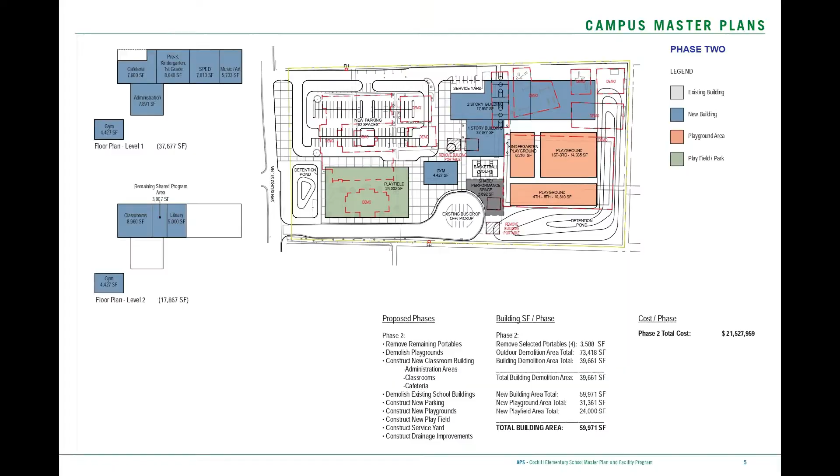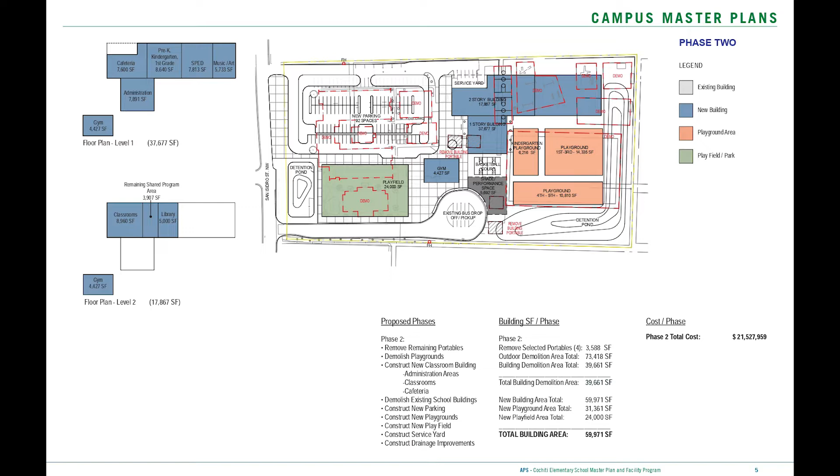Our team prepared the long-range campus master plans for 3 existing elementary schools for Albuquerque Public Schools. The campus master plan will serve to guide future development at each campus over the next 25 years to meet current APS design standards.

The planning and design efforts involved extensive research of existing documentation for each school, including utility locations and capacity, easements, accessibility, and drainage, as well as a complete building conditions assessment to determine the appropriateness for future expansion or renovation. Our team met on numerous occasions with the APS Facility Design and Construction Department and with representatives of each school to determine school-specific space and equipment needs.

APS space standards as well as specific APS guidelines for building systems, playground, sustainability, and security were all incorporated into each master plan. The final master plan for each of the schools was completed on schedule and in compliance with all APS design criteria. With the passage of the recent $650 million APS bond and mill levy, additional design work for Huitt-Zollars with APS at these schools or at other campuses is very likely.

In conclusion, I would like to thank you all for sharing in this occasion. It means a lot to me and our team to be recognized for the work we are passionate about, and to continue our efforts to advance design within the company on all our projects.

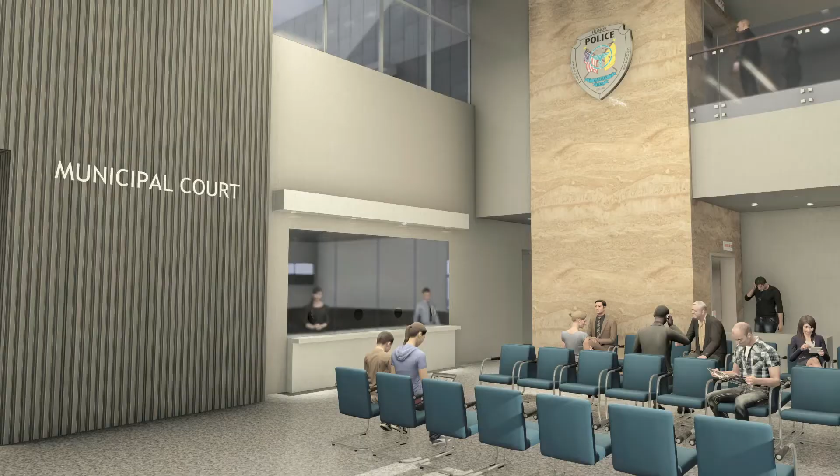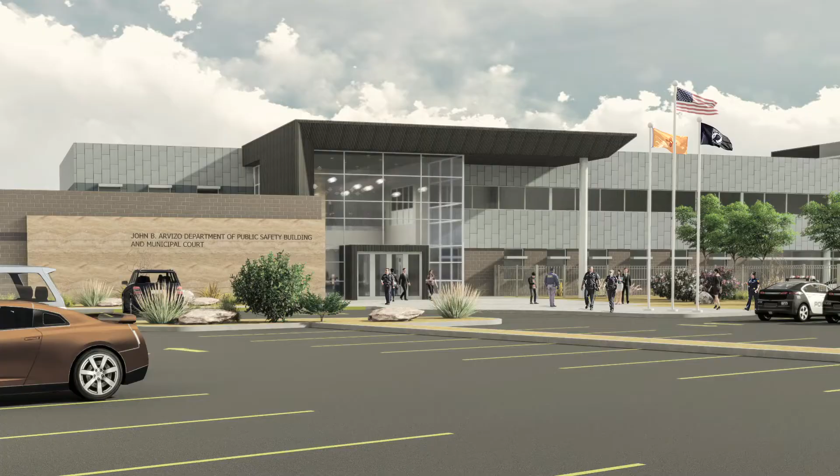The municipal courts will have a courtroom, judge's chamber, court clerks, and administration area. The police department will have a command center, patrol area, space for detectives and narcotics agents, as well as evidence storage rooms. The users wanted an inviting building where the public would feel safe and welcomed.

We accomplished this by connecting the court and police areas with an inviting 2-story lobby. I'd like to thank all the team members for helping bring this project to completion, especially during the challenging times presented by the pandemic. Construction is scheduled to begin in the spring of 2022.

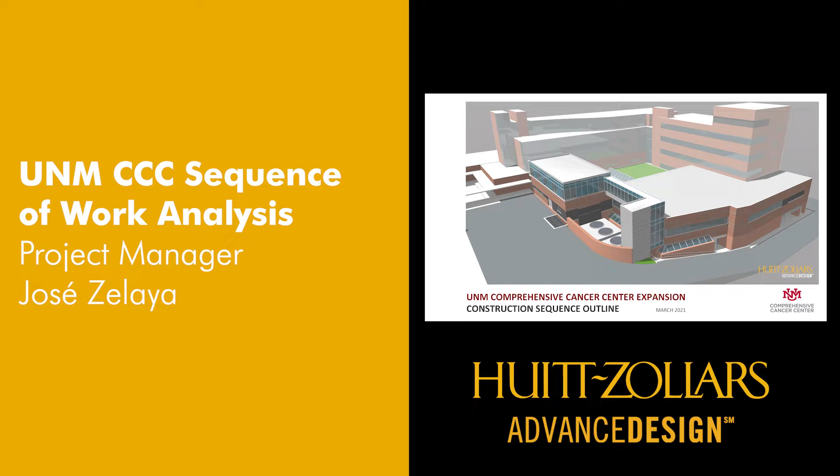UNM-CCC sequence of work analysis. Shortly after completing the planning and programming for the hospital expansion, we were asked by the UNM Cancer Center to provide them with a sequence of work that would outline the major milestones during construction.

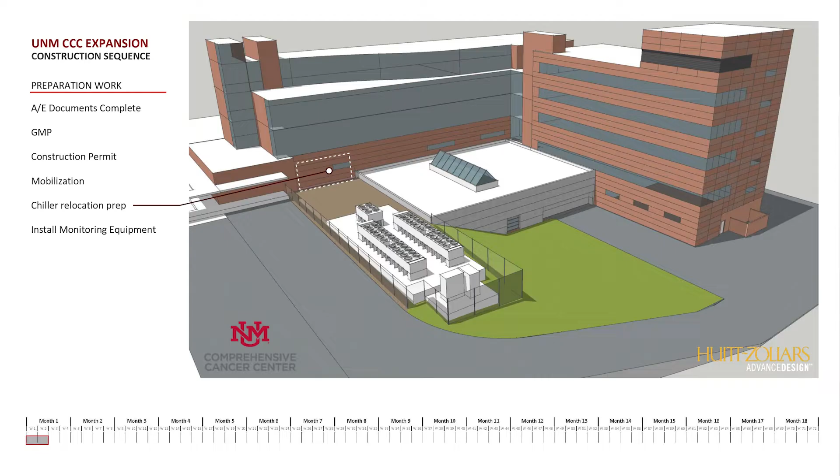We could have provided an 11 by 17 schedule and a 2-page narrative, but instead we created a series of sequential slides and a video animation that illustrated the construction process from the early packages all the way to site work and the final completion of the envelope.

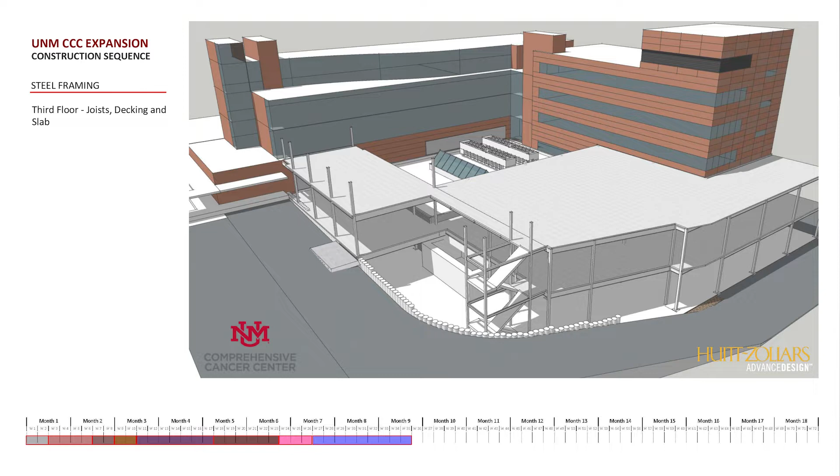This video allowed the hospital leadership to get a better understanding of the project and have a tangible and clear idea and expectations during the construction. At the same time, I think it left a pretty clear impression that Huitt-Zollars understood the scope of work like no other firm did. We used this video during the project interview, and we're convinced that this is one of the reasons why we were ultimately selected to be the design architects for this project.

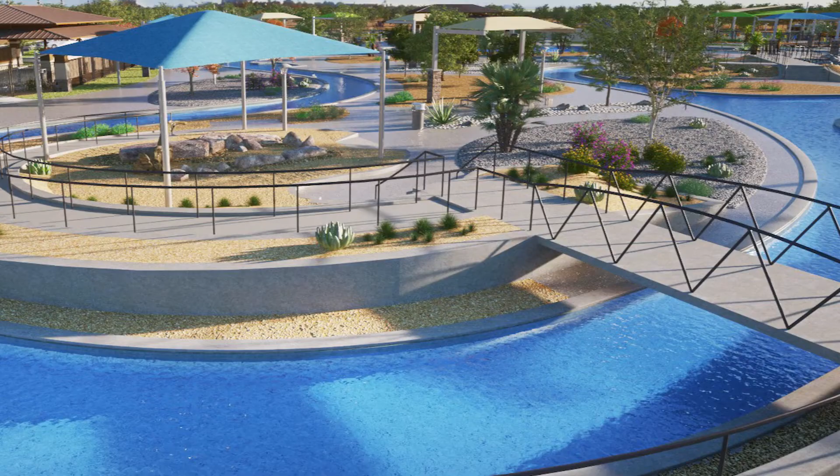I would say the Campo del Sol Lazy River Amenity Center's significance is that it's just a very unusual design for a community. It's something we have only done one other time, and it's also something other developers and landscape architects are now copying. So we did it first, and now we're doing it again, and seeing other firms copy that design.

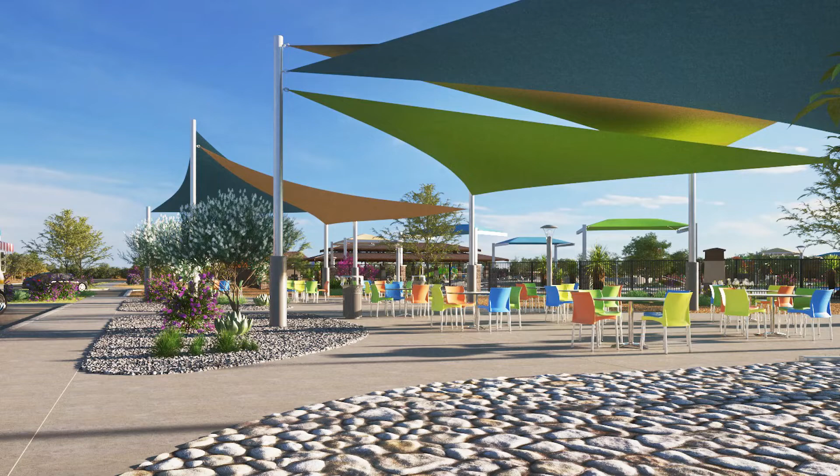So we've obviously stepped into something that people like, both the design and the idea for their community. Its uniqueness has an over 1,000-foot lazy river with beach entries and waterfalls, a unique experience for a community. Most communities will just have either a splash pad or a swimming pool, and we combined all three of those into one unique design that provides something really different for the homeowners buying a home.

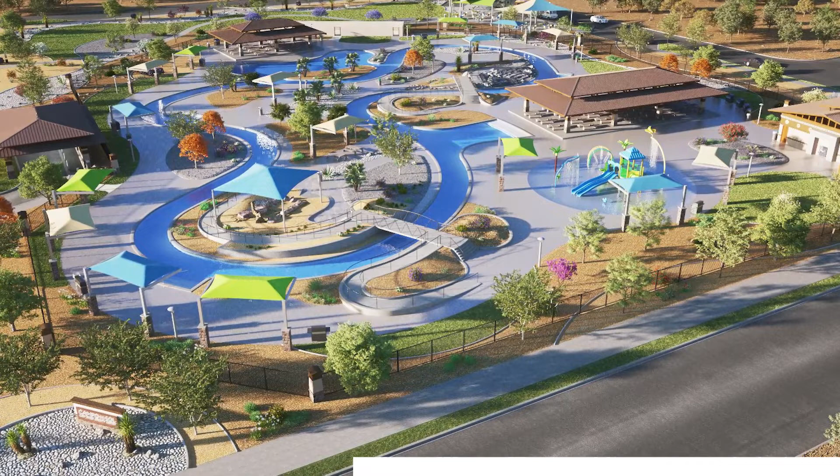The one we did in Sunfield two years ago sold 768 homes in one year, which is a very high number.

The Lake Ralph Hall project is a progressive design build project. We were teamed with Flatiron, which was set up by Mr. Steve Simmons, who was the contact for that. The project is really a result of the Upper Trinity Regional Water District building a new lake, the first lake in a long time for North Texas. As a result of building the lake, they had to relocate two roadways, State Highway 34 and FM 1550, for TxDOT. So that's a general overview of the project.

It's worthy of recognition because of several factors. The first is that it was a progressive design build, which had never really been utilized in Texas on a roadway project. So it was a unique design delivery method. It was new - Flatiron had some experience with it in other parts of the country, but in Texas it was the first time it had been used. So I think from that standpoint, it was worthy of recognition.

The second reason it's worthy of recognition is the effort the team put in during the design, having three different people review each submittal. It first went to Flatiron, then to Upper Trinity, and then ultimately to TxDOT. So each submittal had unique, or several submittals back to back, which was kind of unique. But the team really stepped up, and there were some late nights, into the early mornings, to meet some of these submittals.

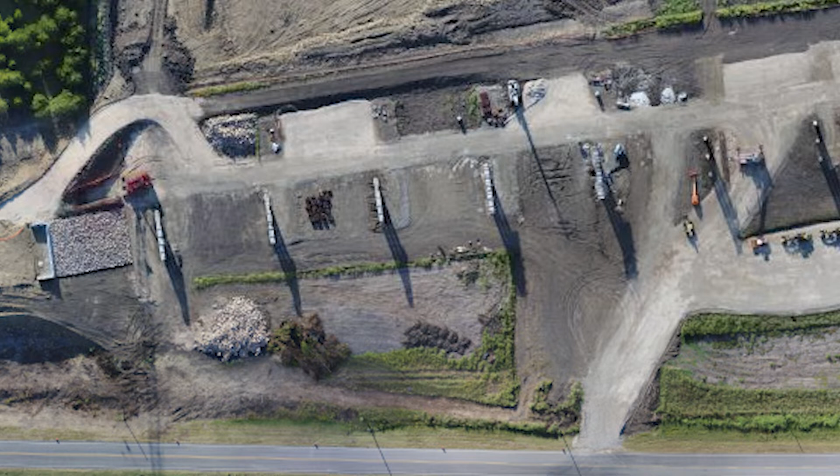But I felt like the team gelled. They seemed to pull together and work together. So it was really good to see that from a management standpoint, that the team seemed to enjoy working on the project.

The Red Tail signage project is for an existing park and amphitheater that the city of Plano is attempting to rebrand so they can bring in more concerts, more plays, a whole different entertainment set to their amphitheater area. To do that, they hired a marketing firm that came up with the Red Tail Hawk and the name Red Tail Amphitheater. So the city hired us and said, how can we take this idea and rebrand the amphitheater with this new hawk logo?

So we took that design, and I sat down with William Wallace in our Fort Worth office, a structural designer who's really good with metal. We came up with an idea to put this hawk logo on top of their existing signage, and also build new sign monuments with this hawk on top. We also had the red tail hawk cut out of sheets of metal and attached to the sides of their entry pavilions, their restroom pavilion, and on the front of the stage.

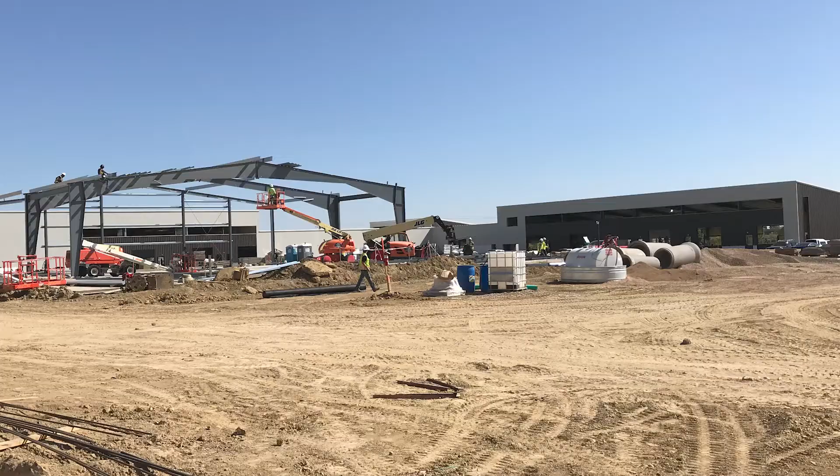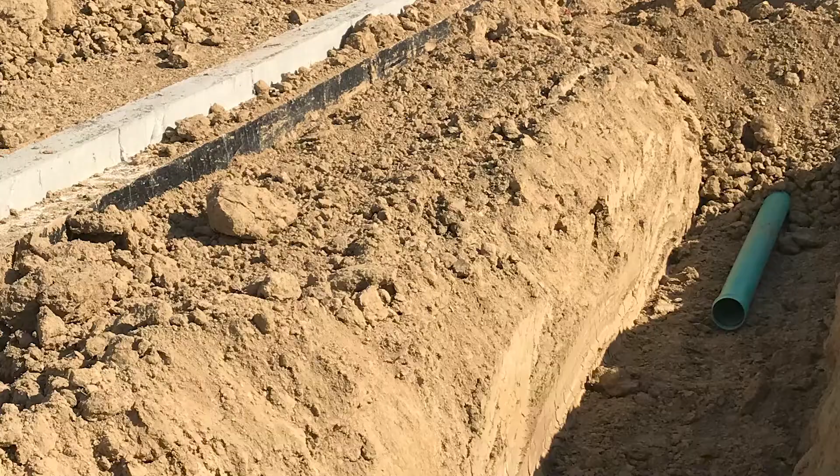The project had a unique problem where we had shallow groundwater and shallow bedrock, so we had to address that to avoid a costly foundation system of drilled and caisson piers. So we devised a way to intercept the water and divert it around the site using a cutoff trench system, re-diverting the water around our site and reintroducing it into the local groundwater system. For this innovation, we were awarded the Honors Award from the local ACEC chapter.

This project involves the reconstruction of New Haven Street in the Mission Valley area of El Paso. Design included over 2,000 linear feet of roadway improvements. It is now a road with two-way travel lanes with curb and gutter, including some sections of rolled curb and gutter. It also included a newly constructed storm sewer system with curb opening inlets, nearly 1,100 linear feet of 24-inch RCP, and a newly constructed retention pond. The project reflects a bike and hike aesthetic with trees and shrubs and rockscape ground cover.

Huitt-Zollars was contracted by J.V. DeSouza Architects to provide site civil, drainage, and utility improvements for the Desert Hope apartment complex in Las Cruces, New Mexico. This project is part of the City of Las Cruces' effort to provide residents experiencing homelessness with affordable furnished studio apartments and connect them with supplementary services to build independent living and provide tenancy skills.

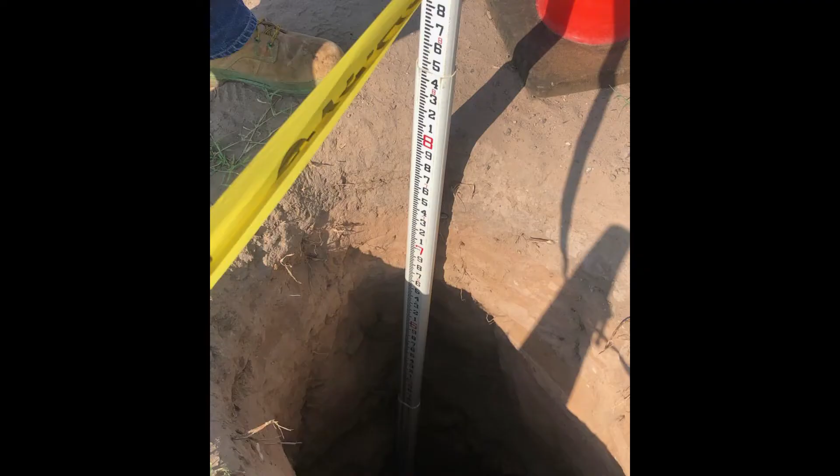The project involves a comprehensive conflict resolution design for El Paso Water's systems. For water, the proposed work includes 12-inch and 36-inch PVC water lines with 24 and 54-inch steel casing, which will be tunneled. For sewer, the proposed work consists of a 15-inch PVC sewer line with a 30-inch steel casing, which will also be tunneled.

This project called for the design of 25,000 linear feet of 12-inch and 8-inch water line, a 50,000-gallon elevated water tank, a packaged booster station, 3 pressure reducing valve stations, fire hydrants, and 17 water services that provide potable water for a colonia near Presidio, Texas. Construction wrapped in September of this year, where we also provided construction administration services.

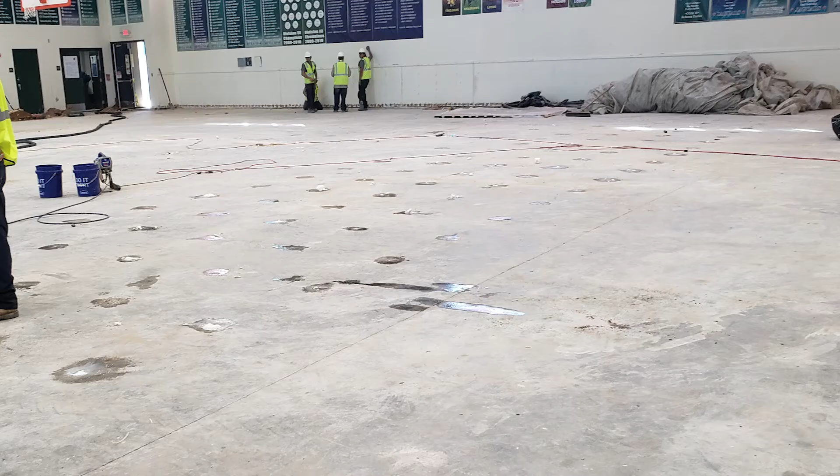Huitt-Zollars was retained by the El Paso Independent School District to conduct a structural and drainage analysis of this site around the Richardson Middle School gymnasium. The gymnasium was experiencing evidence of water intrusion and settling, causing a non-weight-bearing 40-foot wall to show signs of cracking, tilting, and overturning, and the wood floors in the gym to expand.

A report was prepared to make recommendations on what needed to be done to correct the situation, and Huitt-Zollars prepared the design plans and provided construction administration for the project. The district's main concern was the safety of the students and the cost associated with having to continuously replace the wood floors in the gym.

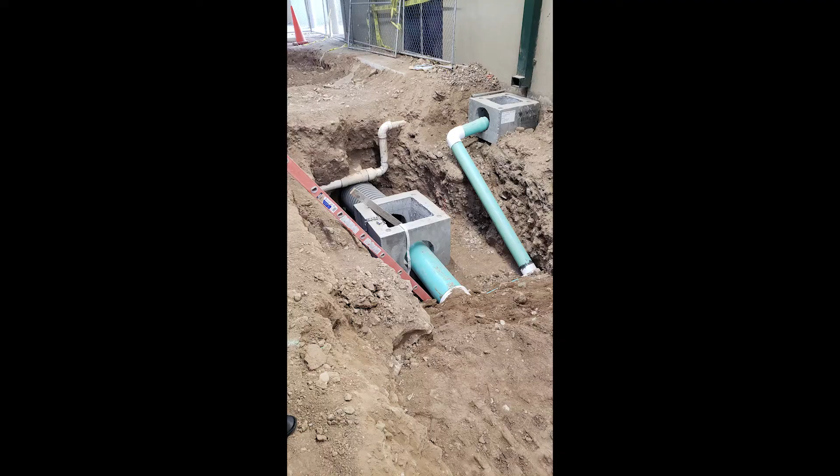Huitt-Zollars reviewed the existing record drawings, performed detailed survey inside and outside of the gym, conducted a field investigation, and verified calculations to the existing foundation and drainage infrastructure.

Based on this research, Huitt-Zollars prepared a structural analysis report and a drainage report detailing the evaluation and making recommendations to stabilize the 40-foot wall and make drainage improvements to the site. The design included plans to install piers at the existing footings to stabilize the wall and to jack the floor to level the court. Huitt-Zollars also designed drainage improvements to convey runoff from the existing roof drains away from the building to the school's retention ponds.

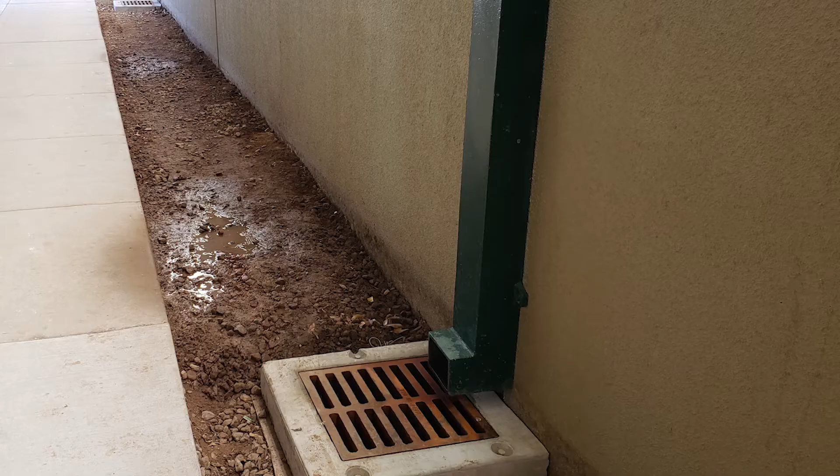The design and construction had to be completed on a very tight schedule to accommodate various activities scheduled in the gym, which also had to accommodate an active campus with over 1,000 students on site. The pier installation and floor jackings, which involved removing the existing wood floors and cutting into the gym floor slab, had to be completed between volleyball season and basketball season. All the work needed to be finished so a new wood floor could be installed during winter break and be ready for basketball season.

The design team coordinated closely with the district staff, campus administration, and contractor during construction. The project was completed on time and on budget.

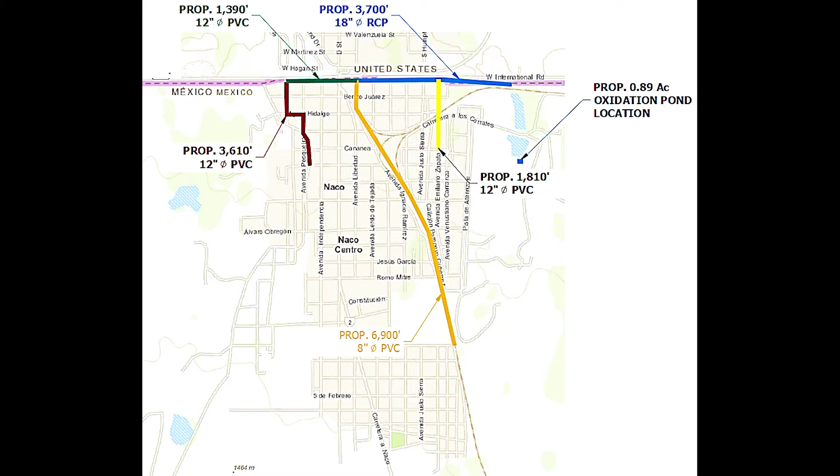Huitt-Zollars provided a transboundary environmental information document and a technical memorandum for wastewater projects that may potentially receive funding from EPA on the Mexican side of the border. The environmental report and tech memo essentially need to prove that these sewer projects will also be beneficial on the U.S. side of the border and provide technical expertise on diverting wastewater flows to the U.S. side, either to Naco, Arizona or Bisbee, Arizona, in case of an emergency.

The Four Leaf, a well-appointed high-rise condominium in the heart of the uptown Houston district, was originally constructed in 1982. Its iconic 40-story double towers were designed by renowned architect Cesar Pelli, and each tower includes 200 condominium units.

In 2019, the Huitt-Zollars Interiors team was awarded the opportunity to provide interior design services for the renovation of amenities and all public areas. Reception, party room, staff space, elevator lobbies, and residential hallways were all to be updated to reflect the sophisticated expectations of its residents. Of particular importance was attracting younger buyers in a competitive market while also increasing the value of the property. Of equal importance was reducing maintenance costs and increasing life cycle by exploring energy-saving lighting solutions within the 72 residential corridors. With over 300 residents, satisfying all parties would be unattainable.

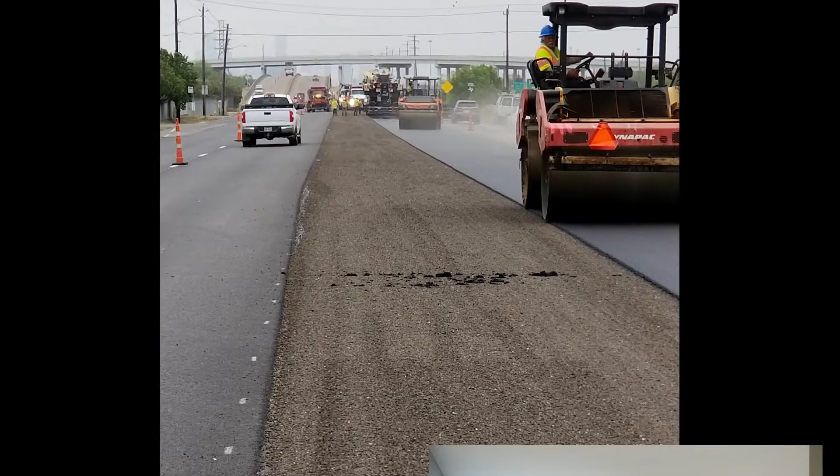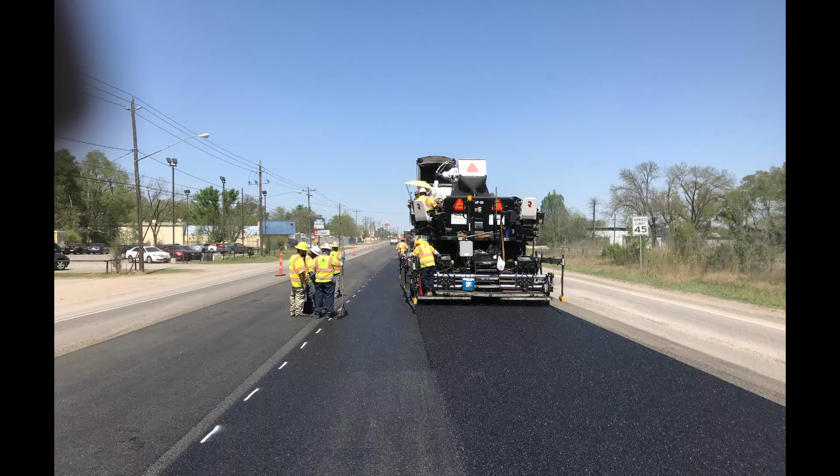Huitt-Zollars was retained by TxDOT to provide services for the resurfacing of State Highway 521 from Interstate 610 to Broadhurst Drive. Construction consisted of rehabilitation of the existing road, including base repair, milling, seal coat, thin overlay, concrete pipe, and pavement markings. This roadway is a primary route which also serves as a key arterial into the Texas Medical Center.

Because of the heavy traffic, managing traffic flow to allow for construction activities to occur was a challenge. Eight different intersections had traffic signal and striping upgrades to improve vehicular movements along the corridor. Additionally, local flooding issues were addressed with improved drainage systems at various locations. Though the project was being funded by TxDOT, extensive interagency coordination was required with the City of Houston, Harris County Flood Control District, and the railroad. The completion of the project provided a new riding surface and improved mobility in the area.

The City of Dickinson requested our services in modifying existing spaces to serve the community during the pandemic. The CARES Act would reimburse the city for the cost of changes needed to create a safe environment for city employees and the public coming to the City Hall. The challenge was that the work would need to be designed and built in a matter of weeks in order to receive the CARES Act reimbursement.

The council chamber's design was the main focus. The dais was expanded to allow for proper social distancing between the council members. An ADA ramp was added and finishes were updated. The other request Huitt-Zollars addressed was the addition of a drive-up teller window, which would allow for a safe interaction between the public and the service provider.

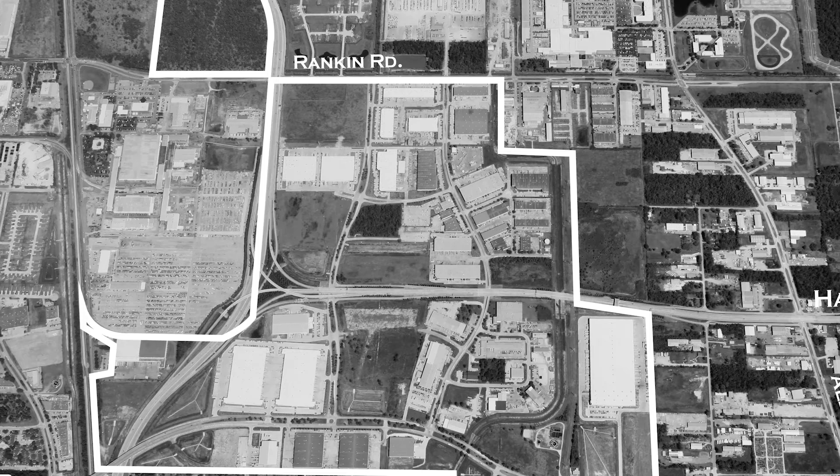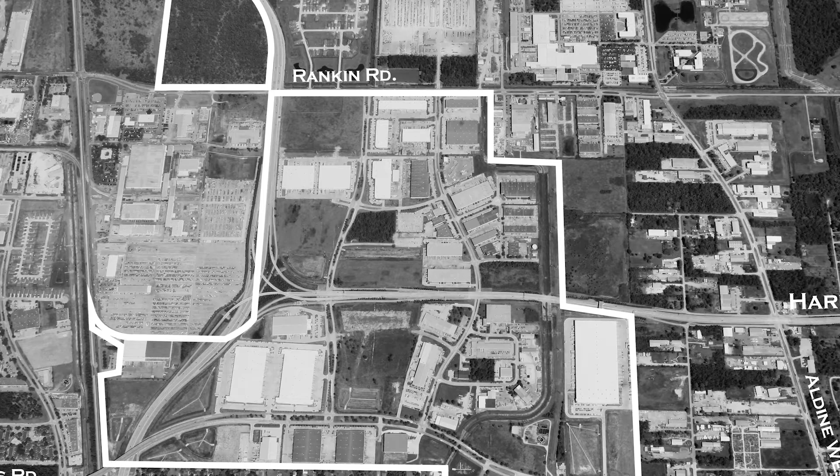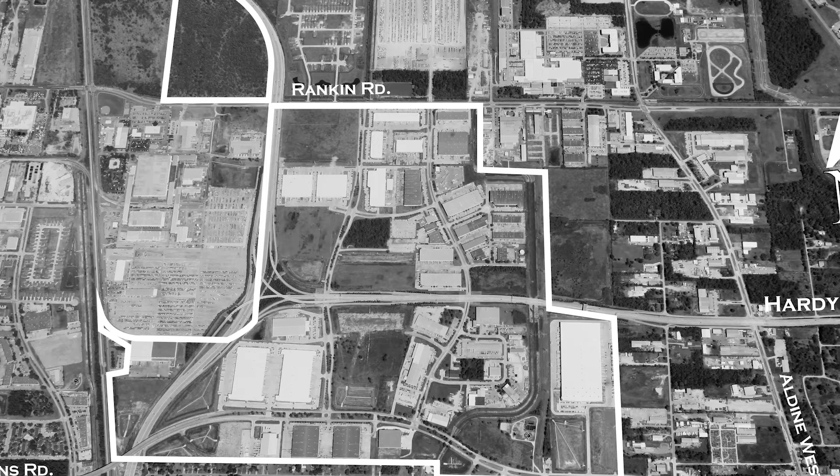Greens Parkway Municipal Utility District is a 550-acre tract located in Houston near the George Bush Intercontinental Airport. The district provides water, sanitary, and drainage to the homes and businesses within the district. As a district engineer, we advise the district on engineering-related items, keeping the district in compliance with the Texas Commission on Environmental Quality and other agency rules and regulations.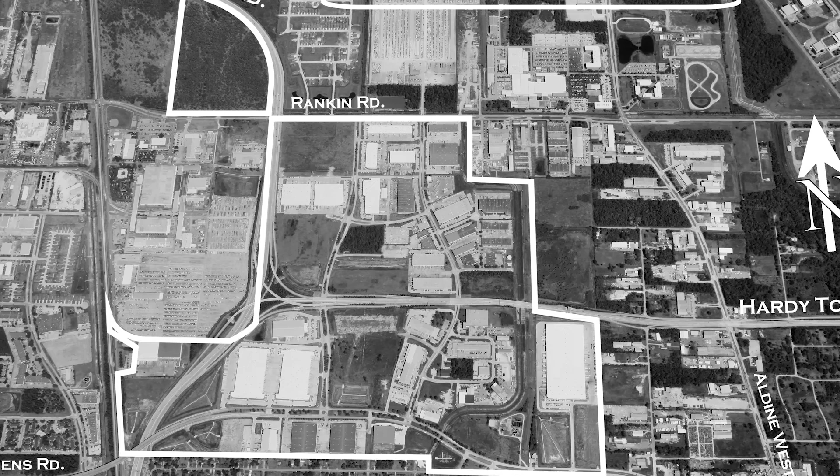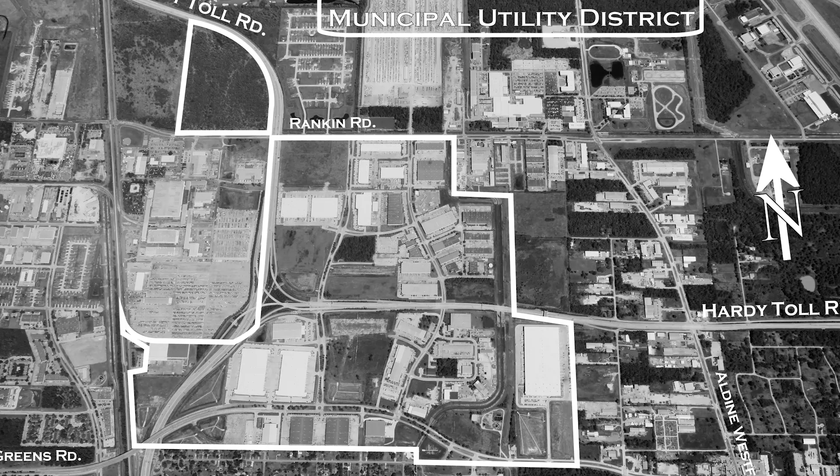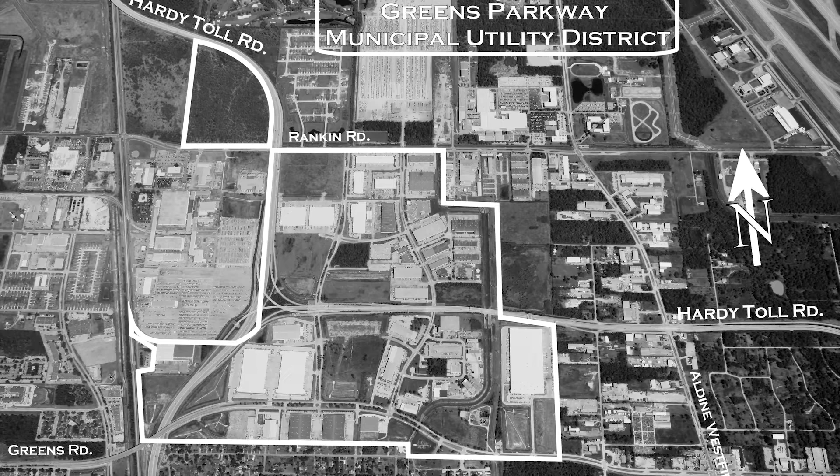We design and maintain the district's water plant, water mains, wastewater treatment plant, lift stations, sanitary sewer lines, and emergency power facilities. All of this requires facilities management skills, civil, mechanical, electrical, and plumbing engineering, as well as surveying and administrative support. Due to our proactive approach in facilities management by creating a GIS model, asset management plan, and a capital improvement plan, the Board of Directors has the tools they need to run a successful district.

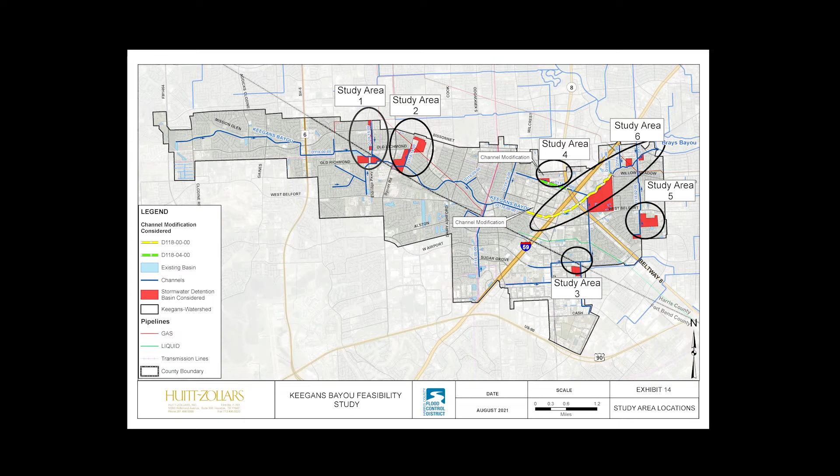Huitt-Zollars was contracted by the Harris County Flood Control District to conduct a planning study for the entire 19.2 square miles of Keegan's Bayou watershed, with the primary goal of identifying the causes of the widespread flooding in the watershed and developing a roadmap for short-term and long-term drainage improvements. The project required coordination with 2 counties, 3 different cities, TxDOT, and Houston Metro.

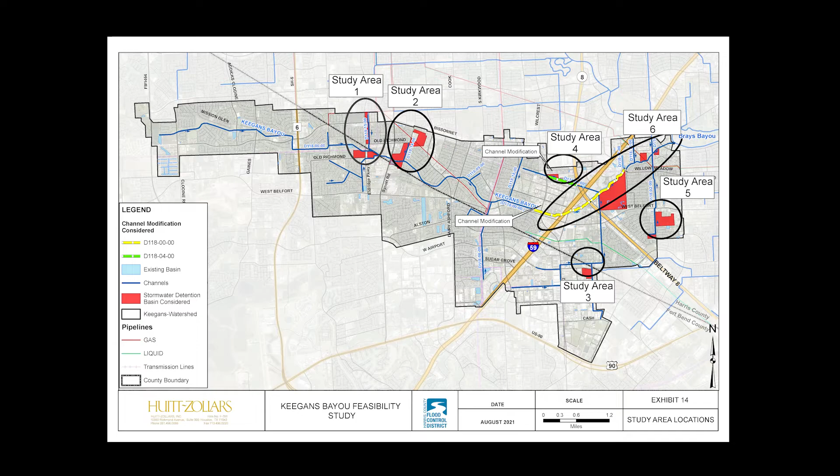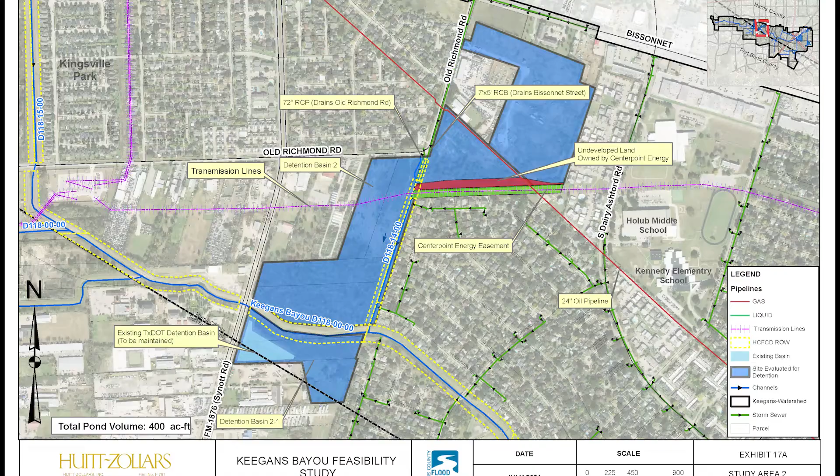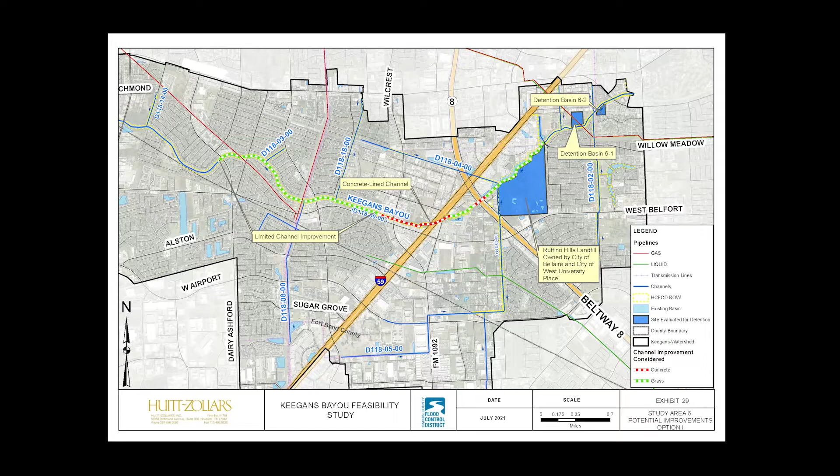The mostly urban area has limited right-of-way for drainage improvements and detention, so we had to come up with a unique solution to address the drainage problems. The study developed 4 short-term drainage improvement projects and 1 long-term project, which include about 2,428 acre-feet of regional detention basins, 3 miles of channel widening, and storm sewer improvements.

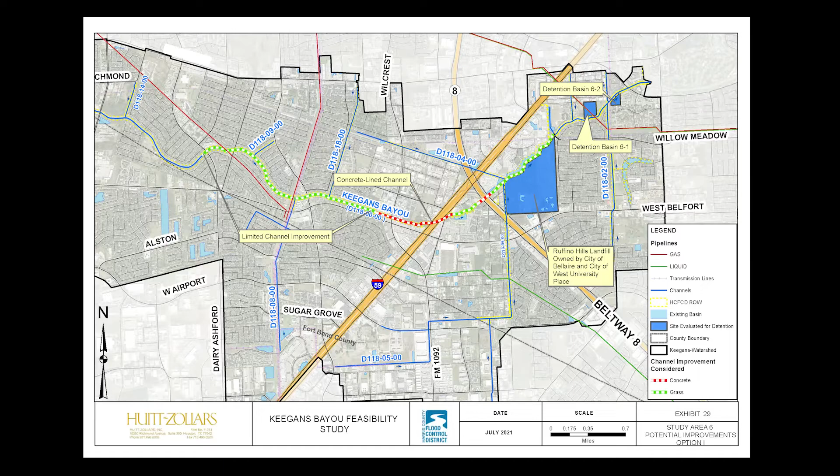2 of the short-term projects were advanced to the preliminary design stage. The client was impressed with our knowledge and experience on drainage analysis, design, and construction, which resulted in practical solutions to implement.

Huitt-Zollars, along with our registered accessibility specialist, has performed assessments on 54 of Metro's existing park and rides, transit centers, and facilities. This was performed with detailed field inspection, and detailed cost estimates were provided to Metro for their CIP programming. Metro has then selected Huitt-Zollars to perform the design on 4 of these park and rides, including the Downtown Transit Center, which is a hub and connects major park and rides as well as transit center connections.

The design efforts were expedited to meet the construction schedule and take advantage of the low traffic volumes within downtown Houston. But even with the challenging schedule, Huitt-Zollars' team was able to complete the project 4 months ahead of schedule, not to forget the challenges we had from COVID.

Hi, I'm Leslie Manzano. The sidewalk curb and ramp assessment was an effort to create a comprehensive database of pedestrian accessible features for the Five Corners District, that includes tax increment reinvestment zones, also called TIRZ 9 and 25.

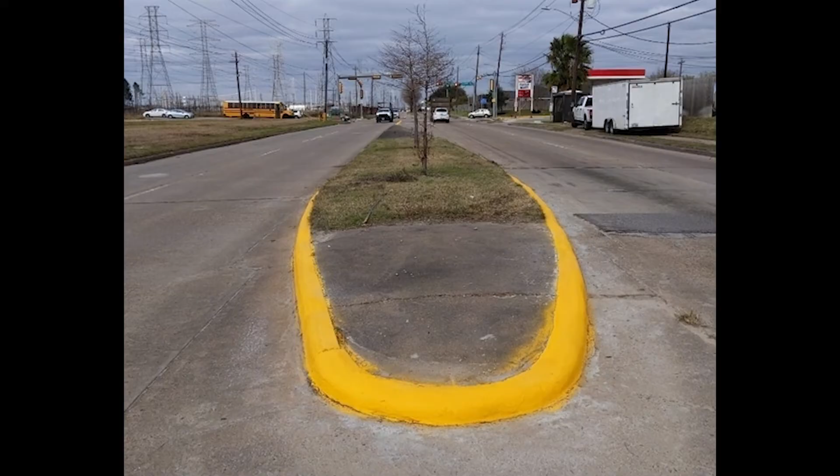The data analysis results were designed to allow the district, TIRZ 9 and 25, to update their capital project plans, initiate projects, and prioritize accessibility improvements. There were about 800 to 1,000 sites assessed and constructed within a time frame of 9 months.

As an engineer of record, HZ used an innovative approach, creating an online platform that gave access to before, ongoing, and after pictures, which enabled the client to have access to the ongoing construction activities.

One of the noteworthy aspects of the California Central Coast Veterans Cemetery project was the level of personalized service provided during design and construction. We were asked to accelerate our design schedule to meet federal grant funding deadlines, which we did. We provided proactive services during construction, including looking ahead to identify potential problems and develop workaround solutions. We encountered an unforeseen condition and came up with a simple, elegant, and cost-effective solution that minimized the impact on the project.

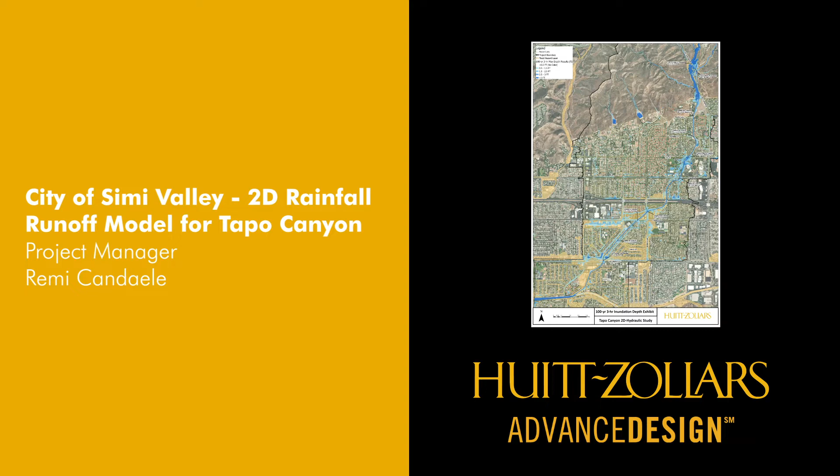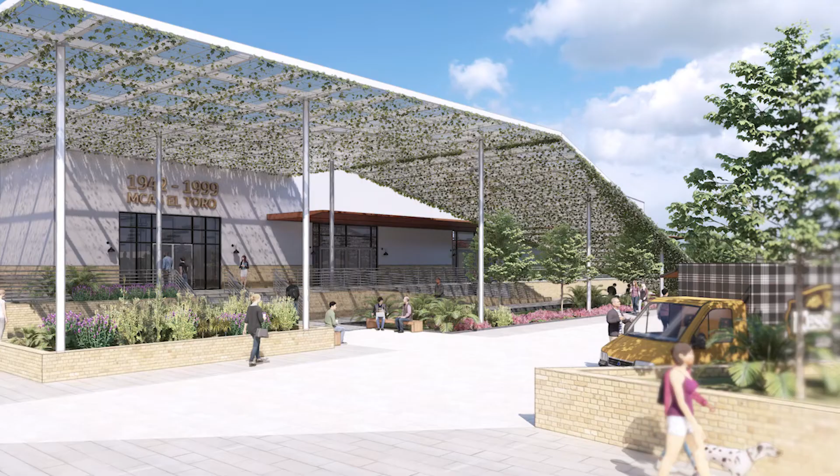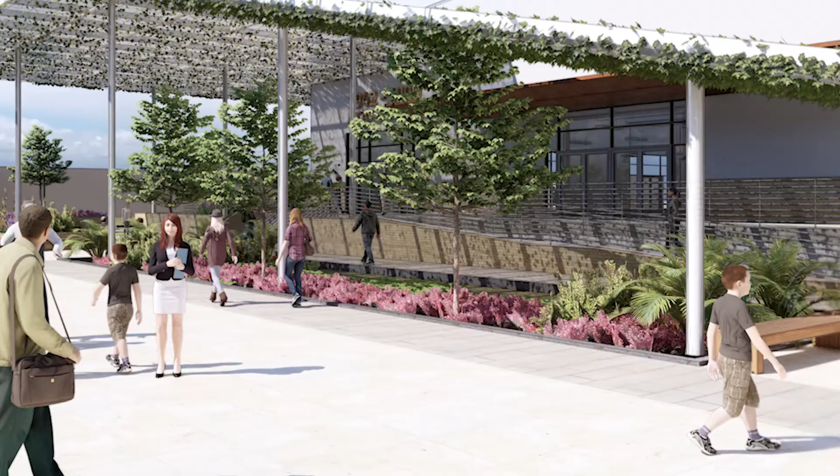For the assessment of Building 369, Huitt-Zollars addressed renovation and repurposing of a former military building for use in the city's Great Park Cultural Terrace area. This building, along with others adjacent to it, provides an important link to the site's legacy as a Marine Corps Air Station at El Toro. This was believed to be the last place where many of our servicemen touched American soil before leaving for Vietnam, and the first place where many Vietnamese refugees arrived in America seeking freedom after the fall of Saigon. The client was very pleased with the level of detail and thoroughness of our report and cost estimate, and they awarded us another similar assignment on one of the other buildings on the base.

This project was for Patriot Development Partners for the development of a 100,000 square foot industrial warehouse building on approximately 4.5 acres of previously developed land in the city of Ontario, California. The project included the removal of an existing bottling facility and parking lot and construction of a new Class A warehouse, truck dock, truck court, and parking lot. This was the first project with this client, which helped us earn their trust to be part of their development team and has led to 10 additional development projects.

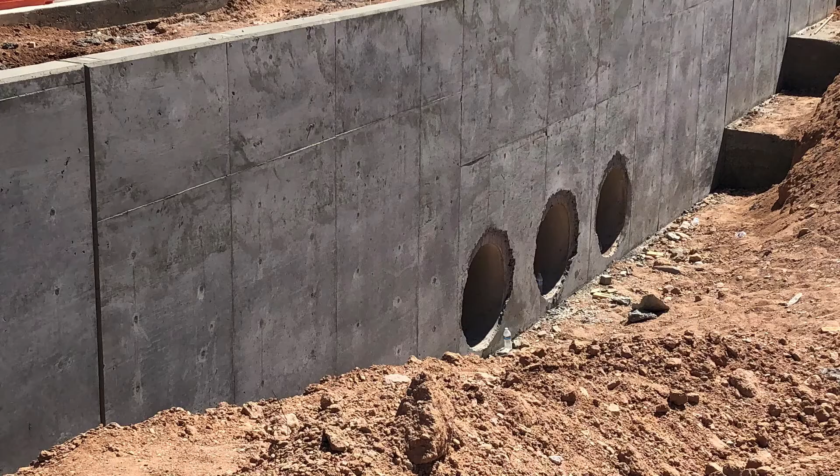We've been working on the Eastmark Master Plan community for 10 years. Eastmark is the best-selling master plan community in Arizona, and each year ranks in the top 20 master plan communities in the United States. Overall, Eastmark is about 5 square miles of development, and DU6 Phase 3 includes 7 parcels and 405 lots. Our team provided planning, survey, and final engineering services for DU6 Phase 3.

The team provided outstanding service on this project by meeting tight deadlines and providing approvals ahead of schedule. During construction, we were always available to answer questions in a timely manner to avoid delays.

The Santan West Area Drainage Master Plan covers a watershed area of 46 square miles within the rapidly developing southeastern valley of the Phoenix Metro in Arizona. This ADMP is part of Flood Control District of Maricopa County's history of proactively mapping flood hazards, establishing mitigation solutions, and constructing flood control infrastructure throughout the county.

This ADMP includes a complex FLO-2D model creation in areas where man-made disturbances have introduced channel systems, drainage structures, and retention systems. The large area includes multiple municipalities where stakeholder and public involvement are critical for the project's success.

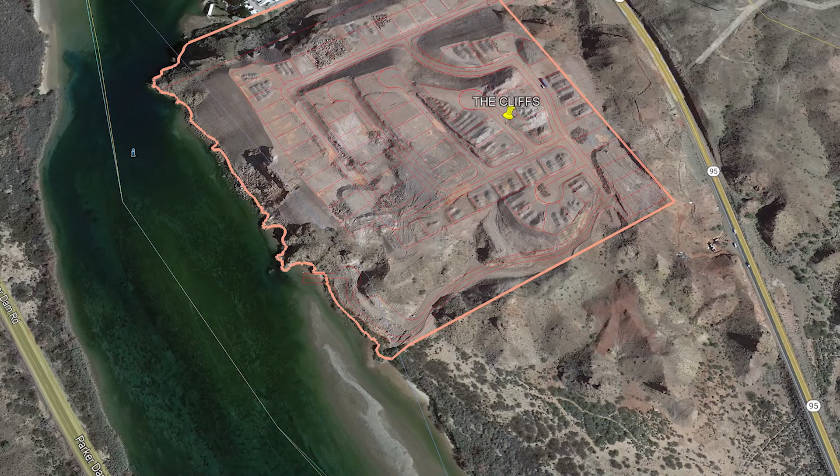On this project phase, we prepared improvement plans for the water, sewer, paving, grading, storm drain, and final plat, which also included water and wastewater systems. It's been a challenging project site, and we managed to deliver our services to our client of 20 years with excellent teamwork.

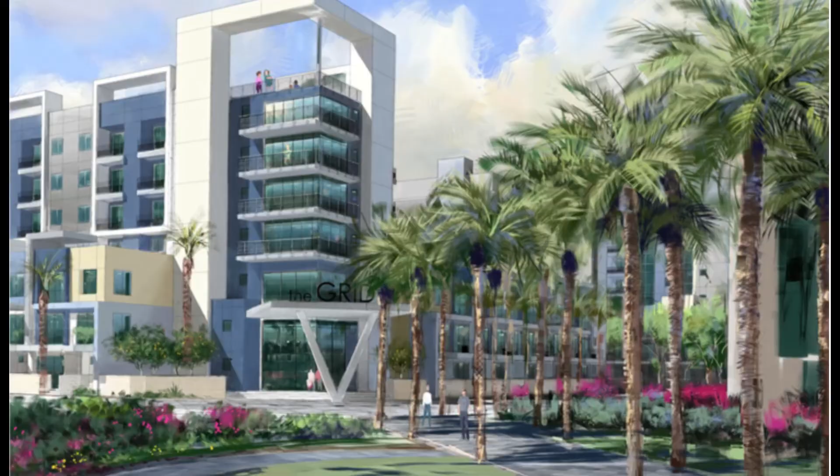The Grid is a unique public-private partnership to bring residential and specialized commercial development to downtown Mesa, Arizona. It is constructed over and around an existing parking garage. The team provided survey services for existing and proposed utilities for the building addition, as well as an analysis for conflicting utility crossings within the roadway and parking for the demo plans.

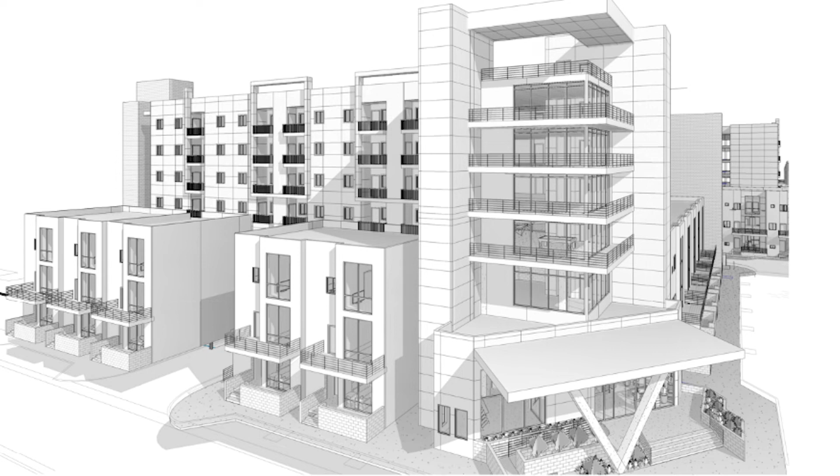We also completed construction staking and will be providing future services as this project progresses. Due to the complexity of the site, we were quick to respond to phone calls and requests from the client. John Fraze went above and beyond for this client because it required quick turnaround with middle or end of the day site visits.

Victory, an active adult community located in the city of Buckeye, has been planned around a golf course and, more importantly, an extensive path and trail system. Hiking and walking paths top the list of what active adults are looking for in their community. Phase 7 and 8 represent the next phases of the overall project.

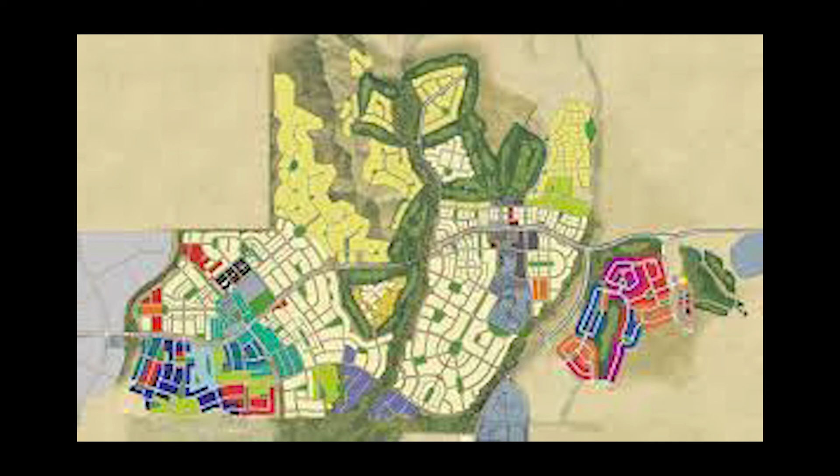Our team has been awarded by our client as the sole engineer for the entire 1,200-acre community. We have been working on this project for the past 11 years. We are confident we will complete the remaining phases because our team will continue knocking it out of the park, or in this case, the golf course.

Huitt-Zollars survey crew members traveled to Nevada to stake a mining claim, facilitating the location and acquisition of rare earth elements. The team had to locate and access the remote project site, taking extra initiative to stay on the existing roads. The main access point to the project was blocked by a locked gate, so the crew researched an alternate point of entry. It was important for the team to be aware of the environmental sensitivity of the area so they could safely stake claims for the client.

Proper planning, including a daily action plan, ensured the project was completed on time and within budget, which was especially important with it being an out-of-state project site.